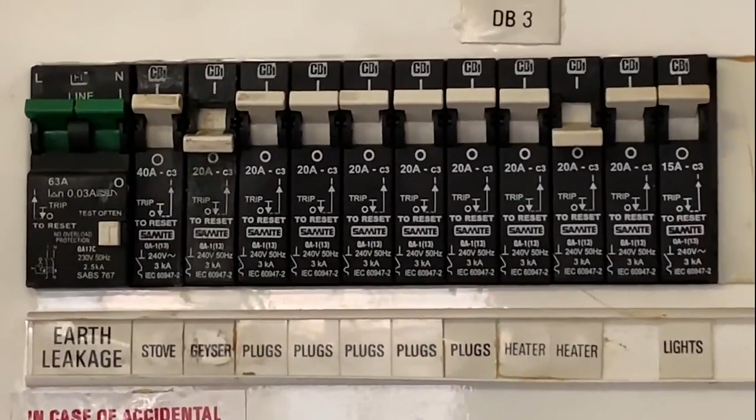This is a distribution board which is standard in most houses. What's very important when you walk into a house, is that the labeling is in order. As we see, there are labels over here, but very important is that every house has to have an earth leakage, which is a main switch which protects the owner from any earth faults at all.

What must have is, you see this white button over here. We've got to test it regularly, probably every 2 months, just to make sure that it is in order.

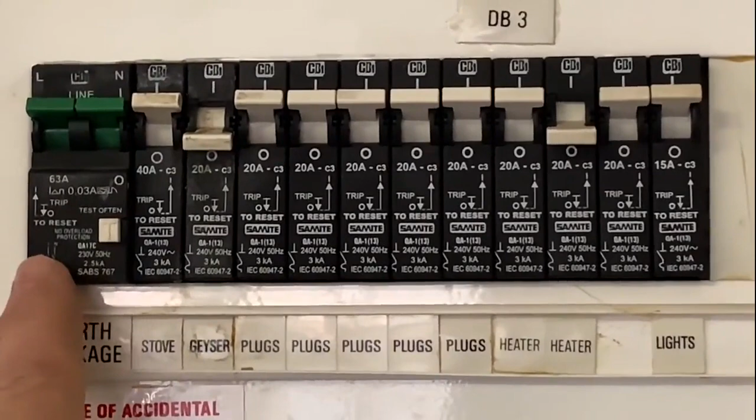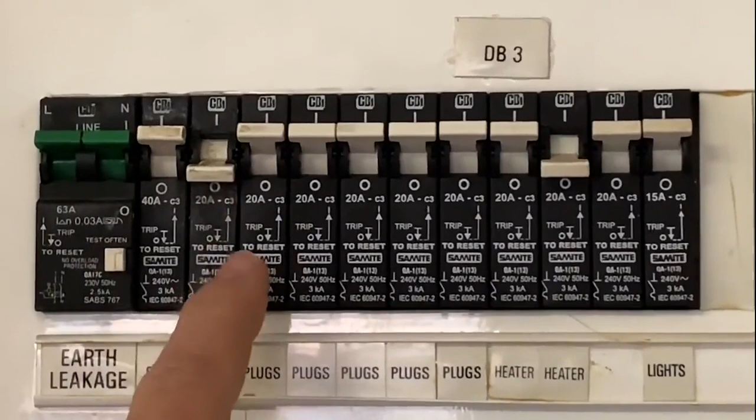Another very important factor is that the labeling and printing from the manufacturers is on the circuit breakers, irrespective of the circuit breaker working or not. If there is no information printed on the circuit breaker, it becomes illegal and has to be changed.

In connection with plugs, when you have a look at a plug, many people are not aware that inside the plug there are built-in shutters over here to protect a little child from putting in a sharp object like I'm doing right now. It stops them from going further.

How this shutter works is when you put a plug in, the top part, the earth pin, as you push it in, opens up the shutters for the plug to go in. And when you pull it out, it must automatically close. So you can see this plug is legal and in order.

While we're on the subject of plugs, I have a meter here that's threefold. It tests the polarity of the switch, it tests the switch is functional, and also it actually sends an earth fault into the electrical circuit to test the earth leakage, that it trips at the correct rating.

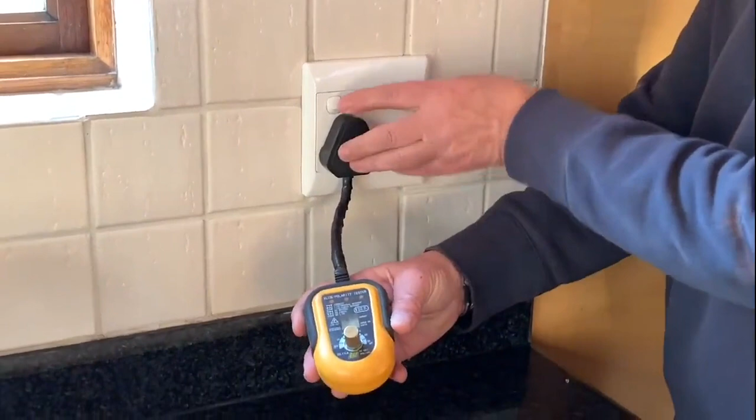I will demonstrate this. So when I put this in, you will see I put the plug in. When I switch this on, all 3 lights are on, telling me that this plug has been correctly wired and is in order. This knob over here, as I turn it, it'll trip the earth leakage at the rating that it's rated at, and that'll indicate if the earth leakage is in order or not.

Gate motors. Many people are unaware that when a gate motor is installed, the regulation states that you have to have a weatherproof isolator mounted next to the gate motor.

It could be mounted over here if necessary, but in this case, this weatherproof isolator was mounted a few meters away, which is over there, which is also legal. But at all times, gate motors must have an isolator to switch off for safety reasons.

COC certificates are very important documents. If you have a look at it, it's very detailed, with a lot of boxes to be ticked off. In connection, it requires what kind of connection it is, if there's an earth terminal, what voltages there are, the KA reading, earth loop, and also if it's existing or new, and how many plugs, how many lights, and circuits on the board.

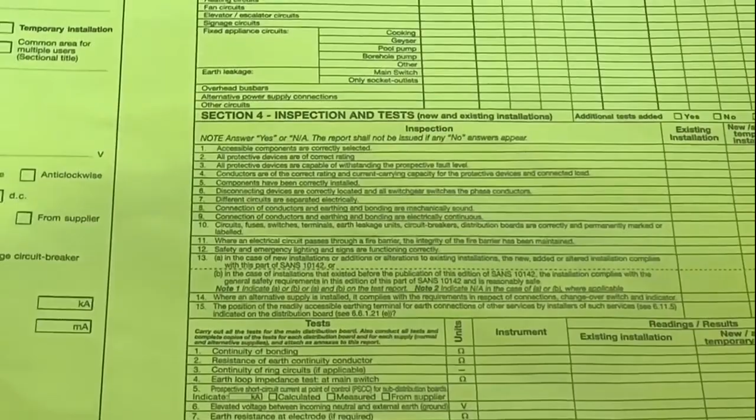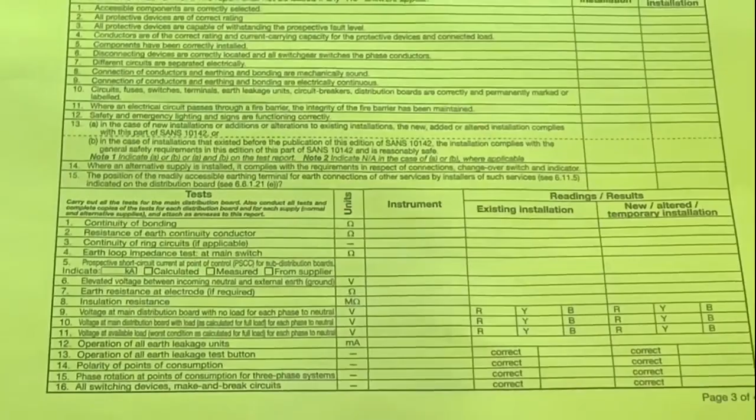You've got questions that you've got to answer, like if the material is SABS approved, and also if it's according to regulations, because we verify this and sign declarations that we've inspected everything. At the bottom are the readings that are required, so that council or any person can see that the readings recorded are within the safety range.

A very important factor to note is that on page 2, point 3, note 3, all geysers, stoves, light fittings, and air conditioners do not form part of the COC. That falls under the appliance category. Only the electrical circuit feeding and supplying electricity to these appliances falls under the COC.

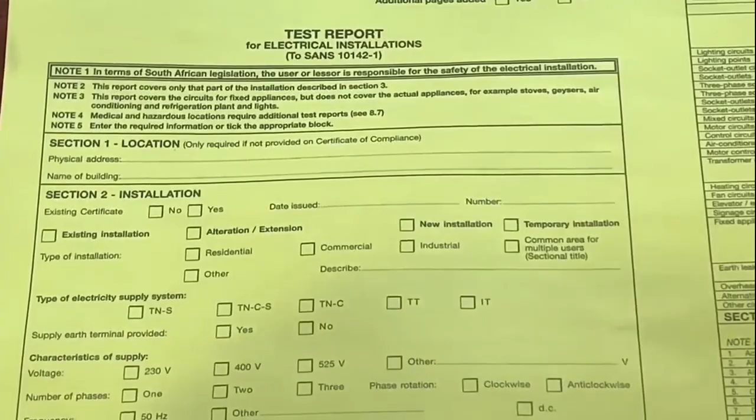What I've shown you is just part of the COC inspection. There is an earth test which takes quite long, over an hour, because we have to test each light that's made out of metal. Any part that's made out of metal has to be earthed, and there are certain regulations that tie in with that.

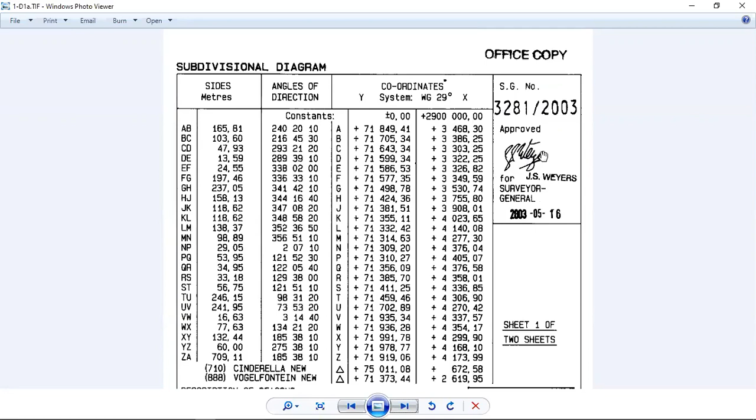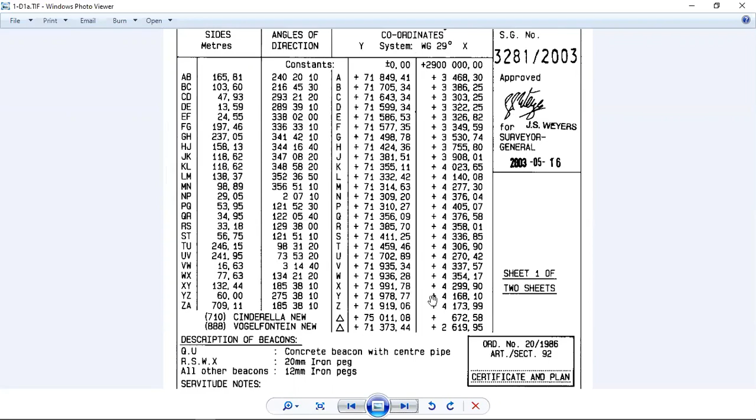It has a data block, which gives all the data in the form of distances, directions, and coordinates for the outside boundaries of the property. There's a description of beacons, a list of servitudes, and the title of the piece of property, where a full written description is given of the property, the area, and its new name. It will be signed by a professional land surveyor.

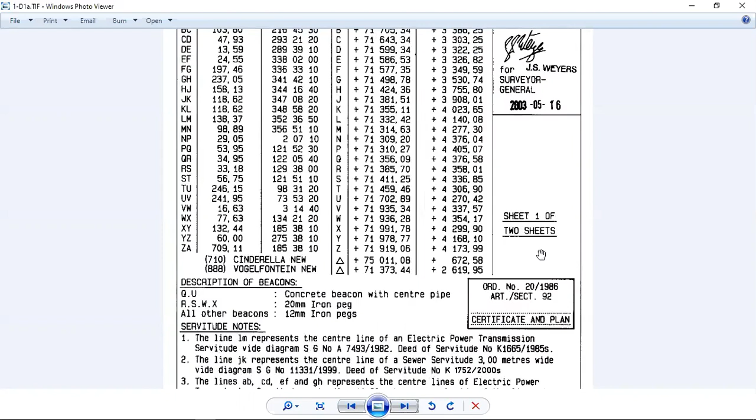These three blocks at the bottom are references. The left-hand one is for the deeds office, and the middle and right-hand ones are used by the Surveyor General's office. This particular diagram consists of two sheets. This is sheet one of two sheets. The next sheet shows us the figure, sheet two of two sheets, being portion 105 and portion 130.

You'll see the figure over here, A, B, C, D, E, F up to Z in this instance. You'll see the servitudes which affect it. There's one over here.

There's a servitude which runs through the middle of the property, and there's another servitude running across there. There's always surrounding data showing whatever the surrounding property names are. There'll always be a scale and a true north. Again, it will be signed by the professional land surveyor.

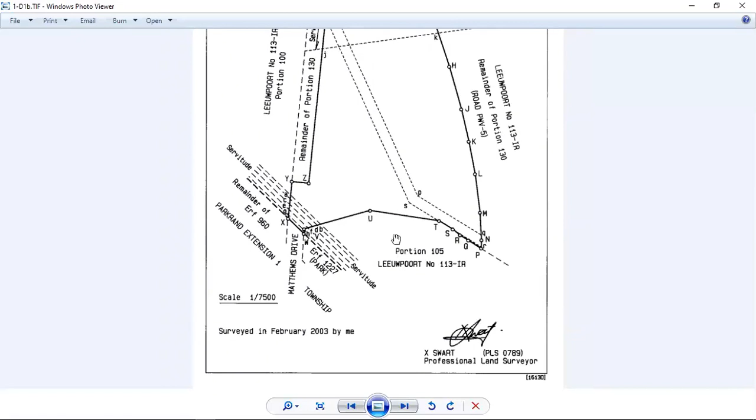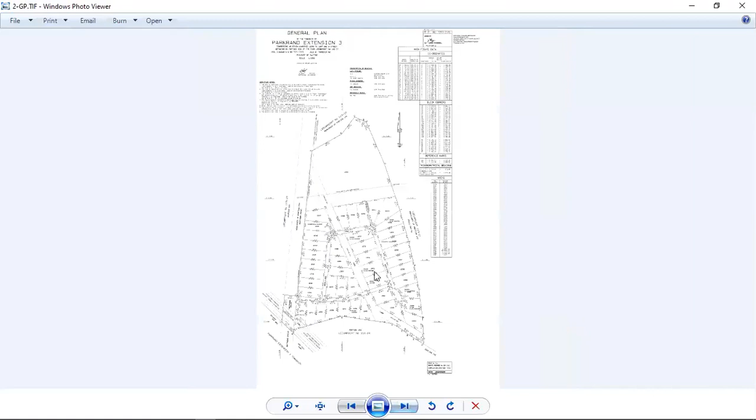One of the reasons I've used this diagram is that it is in fact also the small scale diagram of Parkrand Extension 3. There's a note on it to say that. And here we have the Parkrand Extension 3 general plan.

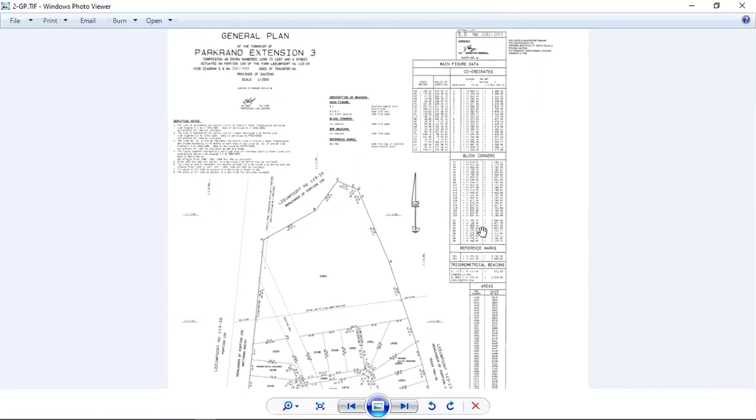In the main, it is very similar to a diagram. You have your heading, you have an approval block with the SG number, you have main figure data, again with directions, distances, and coordinates. You have block corner coordinates, there are reference marks, trig beacons, and there's a listing of all the areas of erven that are depicted on this particular general plan.

On the figure itself, you'll see that each individual erf has got its data shown within the figure. So as you can see here, Erf 1248, the distance along that is 65.66 by 120, 34.5 by 123.98, and the units you will always find will come in as part of your data. It's meters.

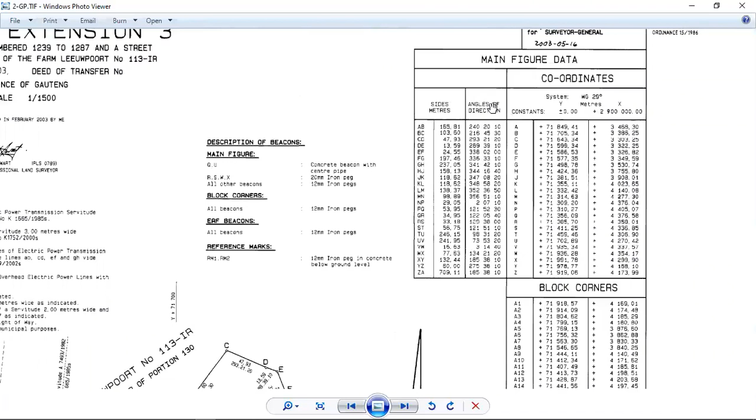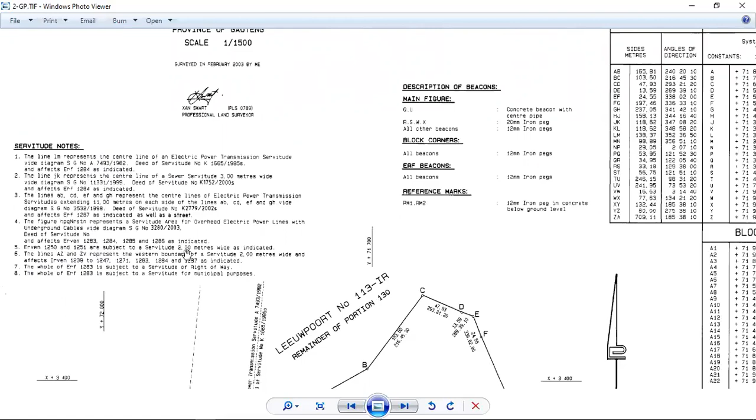There will be a listing of servitude notes. In this instance, there are several servitudes which have been brought forward from previous diagrams, and you'll see all of them refer to a diagram. The last couple, in fact 5, 6, 7, and 8, are created on this general plan, and you will see Erf 1250, 1251 are subject to a servitude 2 meters wide as indicated. And there we have the servitude indicated on a general plan.

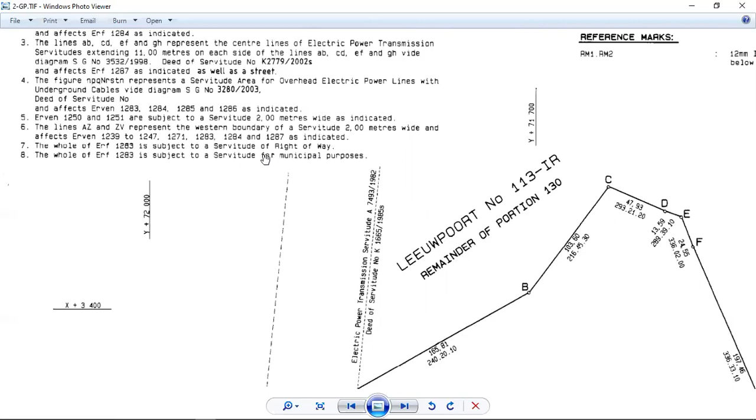Wherever an erf is affected by a servitude, it will say so. So the whole of Erf 1283 is subject to a right of way. In this instance, there is no road. There's a servitude of right of way, which gives access to all the owners. And the whole of Erf 1283 is subject to a servitude for municipal purposes, so the municipality can use it for access to their services and for emergency vehicles, any reason that they might have to enter the township.

Initially, all registration of these erven will be done from this general plan.

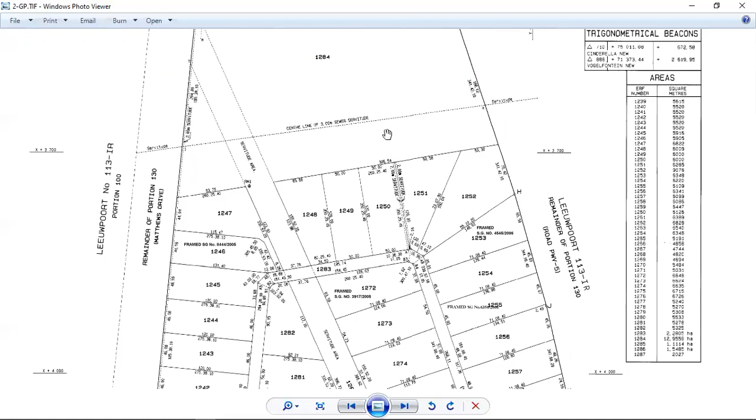When an erf is subdivided and the property is surveyed, the corner beacon is placed and a subdivisional diagram is drawn up for approval by the Surveyor General. As it is a new development, all the data for the newly created property must be shown on the diagram in the normal way. Let's have a look at an example.

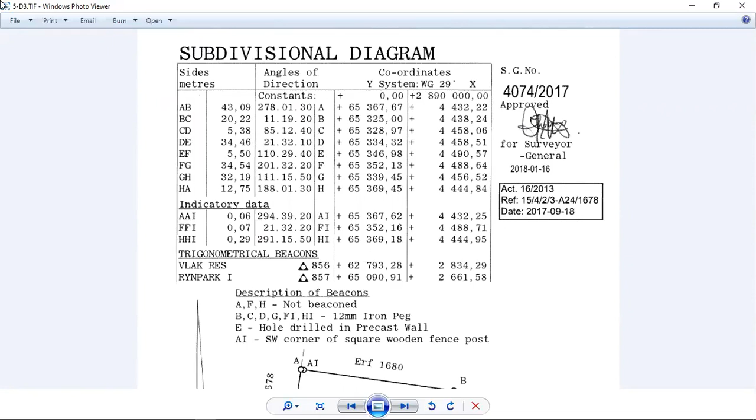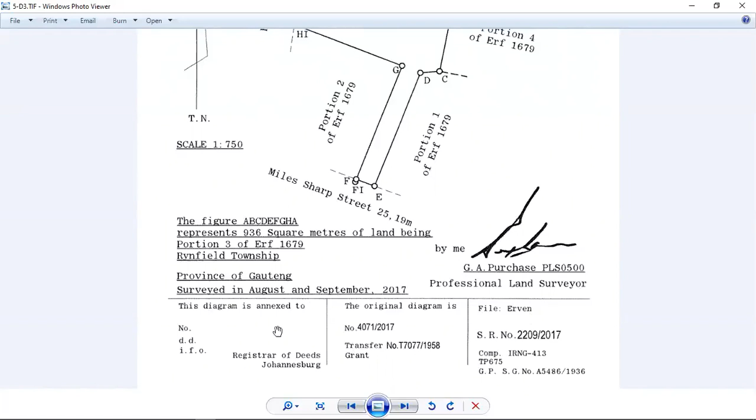Here we have a subdivisional diagram. In this case, the subdivision represents 936 square meters, being Portion 3 of Erf 1679, Rynfield Township. Again, you're going to have an SG number, an approval. All the data is set out: description of beacons, the figure is shown, all the surrounding data is shown, a heading with an area, signed by a land surveyor, and again the deeds reference blocks at the bottom. The fact that there is nothing in this block tells us that it has not yet been registered.

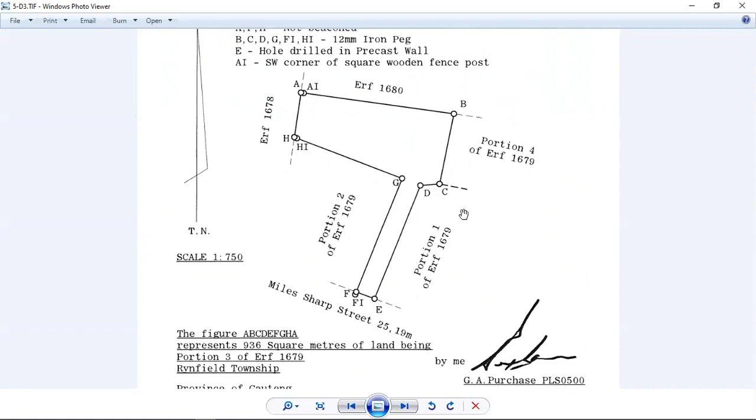As it happened with this particular subdivision, the council required a servitude to be created across it, which they only decided on after the subdivision had already been completed. So we then had to do a servitude diagram over this property. And this is what that would look like.

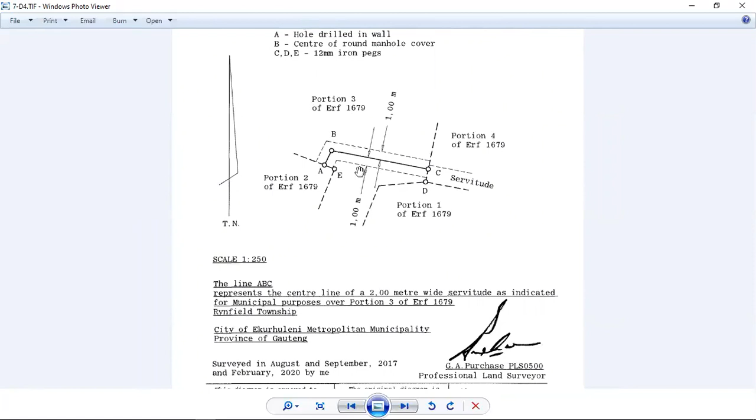It's a servitude diagram. Again, there's a complete set of data: the SG reference number, the approval block, the figure, and the description of the servitude. The line represents the center line of a 2-meter wide servitude indicated for municipal purposes over Portion 3 of Erf 1679. Signed by a land surveyor, and again there are the reference blocks at the bottom.

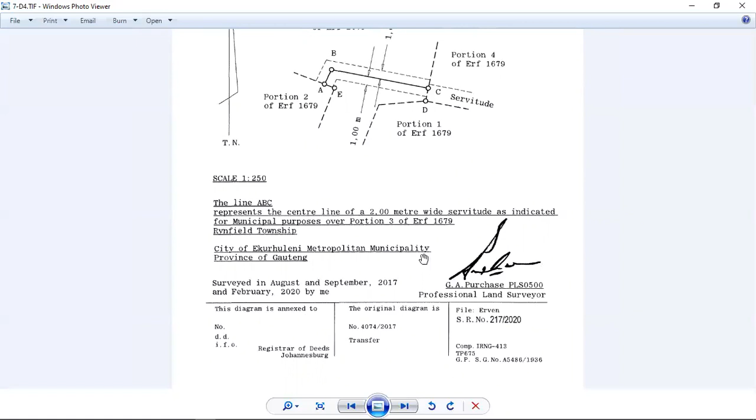Diagrams of the council consent and clearance can then be used to register new erven at the Deeds Office. Please bear in mind that the various plans you may get from the council and your town planners are not diagrams. Unless they've been prepared by a professional land surveyor and have the Surveyor General's reference and approved signature, they're not registrable entities.

There are many other examples of diagrams, but generally they will be in this format. Occasionally you'll find something completely different — this is more the exception rather than the norm. If you come across a diagram or general plan and you're having problems understanding what it is about, contact your local land surveyor who will only be too happy to assist you. Thank you for your time.